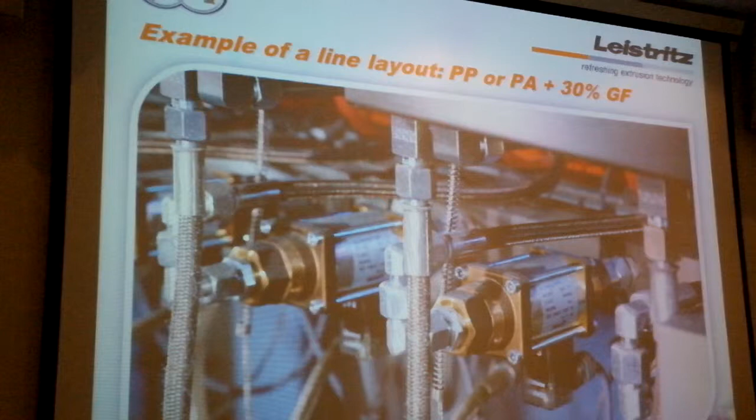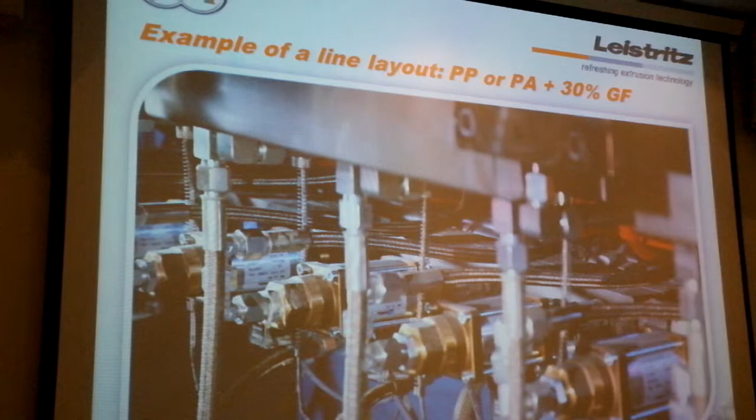Here we have the cooling magnetic solenoid valves underneath the process sections that steer the heating and cooling of the system. And again here the side feeder, with the glass fibers being incorporated into the melt, we go to the strand pelletizing.

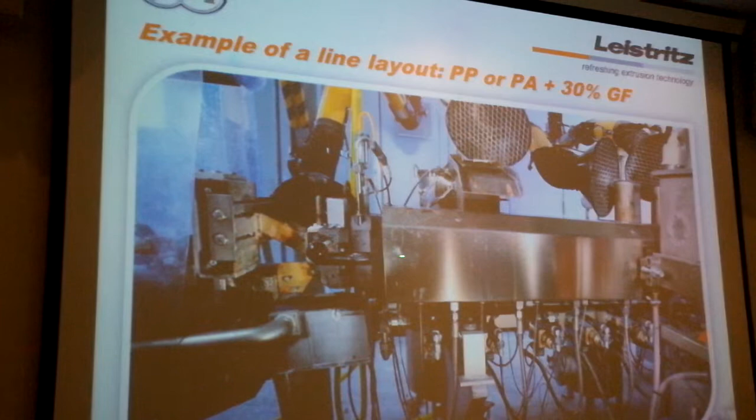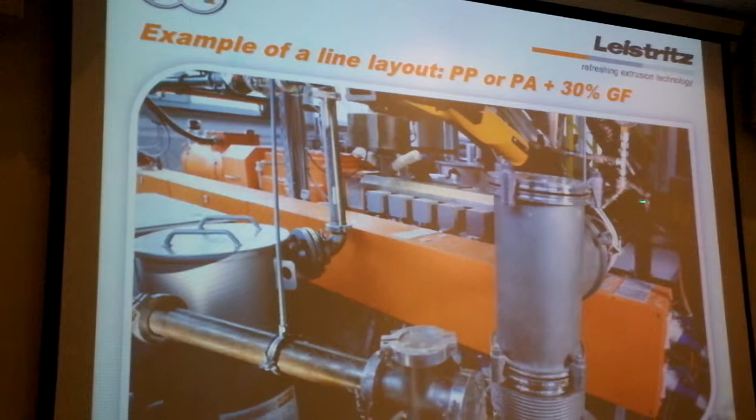Here is also a vacuum vent, which you can see from the back side now. Pretty interesting system, because here it's very important to get the condensate out, especially for polyamide. You know that this is a specific topic that we always have.

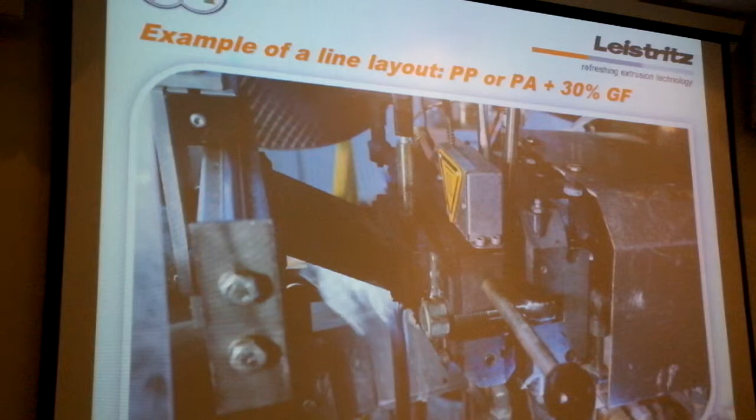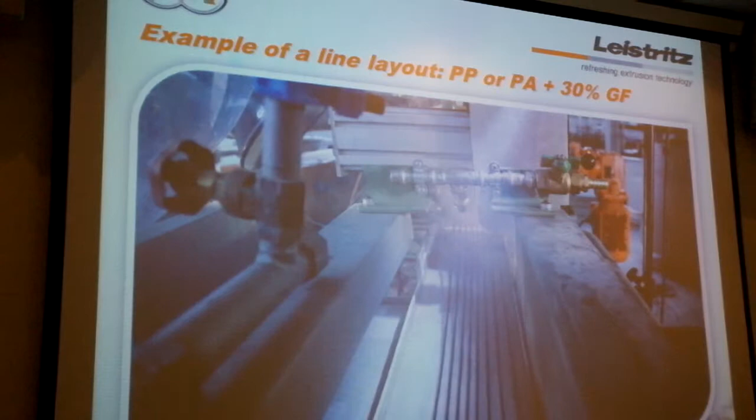And then here we have the strand die. Here we have the strands coming out, and this is an automatic slider. See, now you can change your production. Slide it and the bath comes underneath, and with that we can easily change products and also the cooling trough.

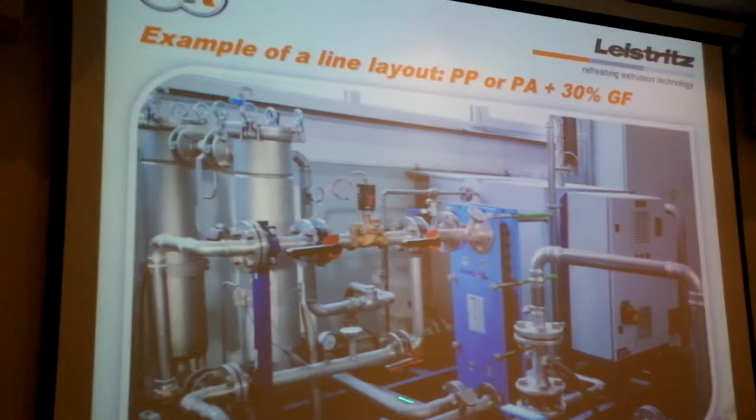Then the strands are cooled, brought into the cooling system. Here we have the water system for the cooling. Pretty elaborate one. Heat exchanger.

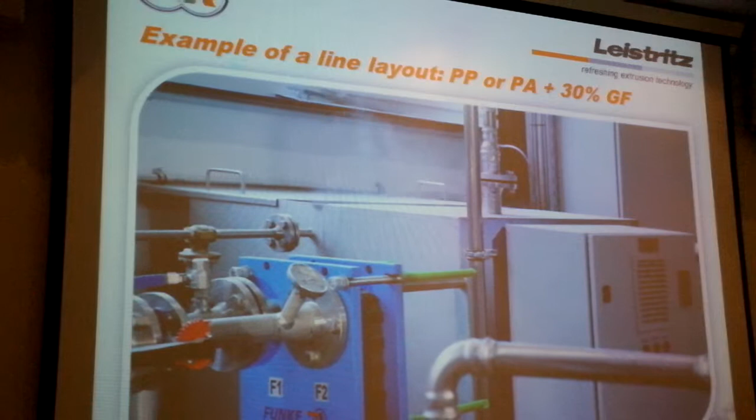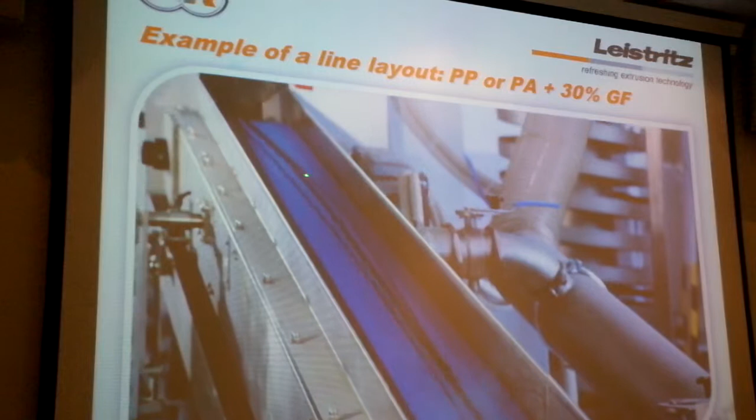And here we see the strands going up the belt. Here you see them still steaming from the water. And then they are guided into the pelletizer and cut into the little pellets, cylindrical ones.

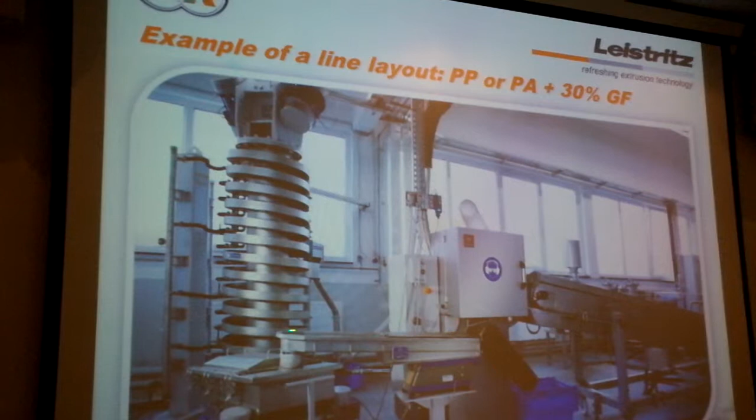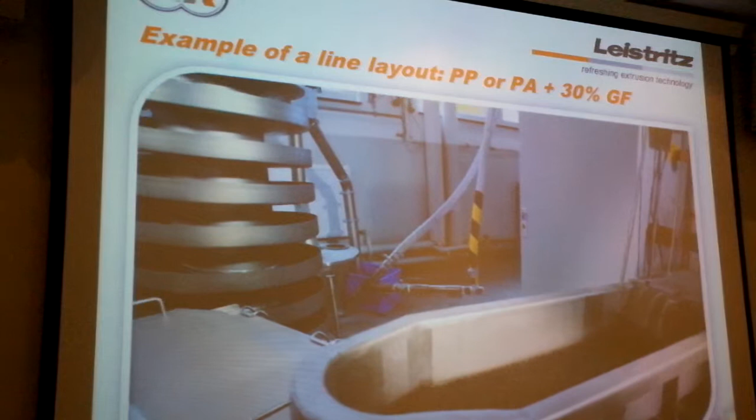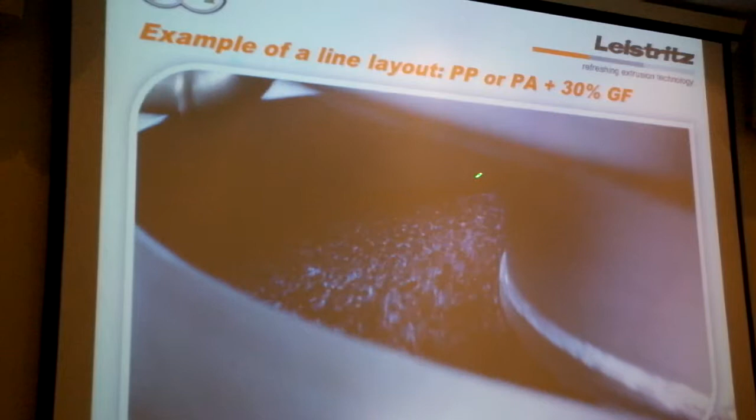After that we take them into a screen, and then in the vibration trough, you can see the screen. There we can take off the smaller pellets and the bigger pellets and just have the spec sizes. And then here we have the vibration conveyor, which brings the pellets up and cools them at the same time. So finally you have a very good, well-cooled and well-sized compound.

Of course, we talked about the ZSE MAXX machines and how they have a big impact on various compounding processes. And here, for example, we have the polyamide system that we just saw. And here we can see very clearly that with an OD to ID ratio of 1.66, we can keep the

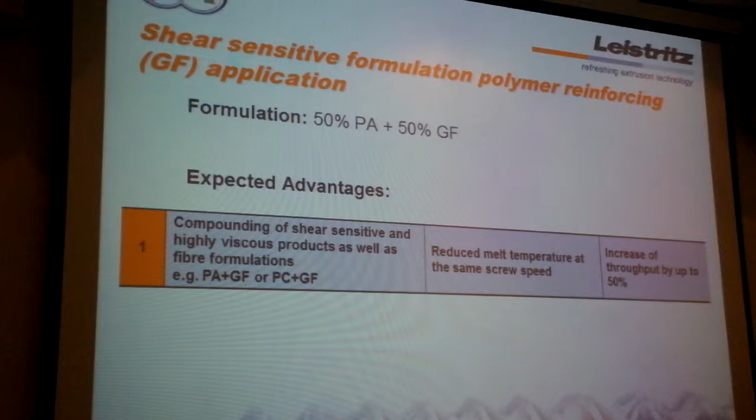melt temperature at a very good rate, and with that increase the throughput in a good way. So compared to the machines that were in the smaller OD to ID ratios, we were able to increase the throughput up to 50%, which is quite a number.

And sometimes it was not even possible to produce it anymore because of the high temperatures that we got.

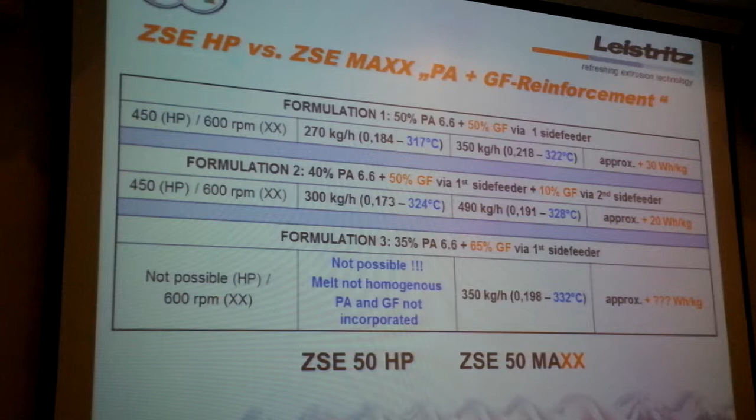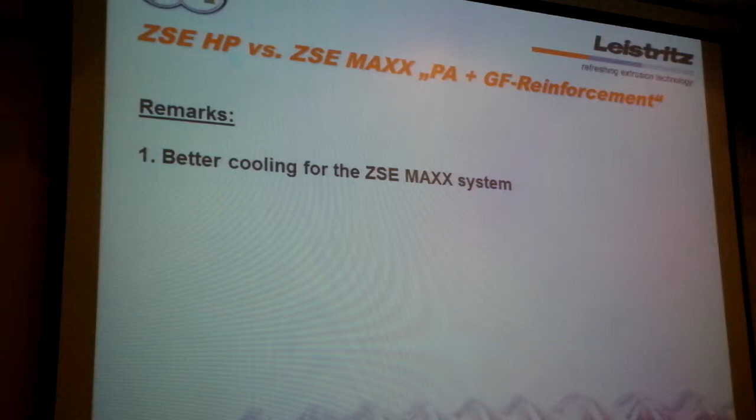Some remarks that you might want to keep in mind. With the 1.66 OD to ID ratio of the MAXX machines, we have a better specific energy input, and also at the same time the cooling system is improved, which means we have lower melt temperatures, and with that we can really have a very wide process window for these systems.

And with that, of course, you can run quite some different formulations with those lines.

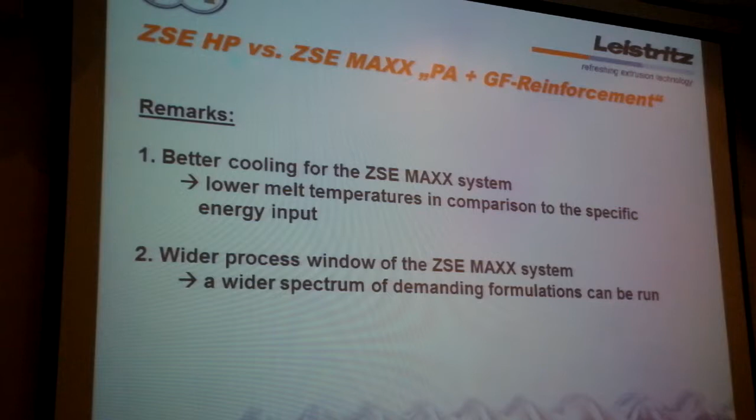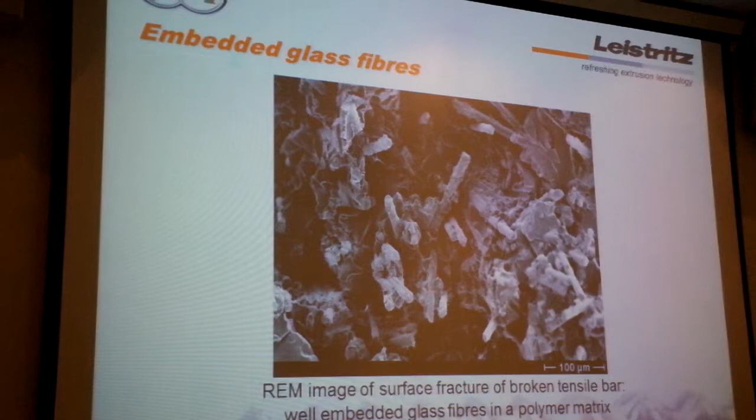So when you summarize that, we have a very high throughput possibility with the ZSE MAXX. Then of course the energy savings are implied, because when you need lower energy input and have a higher mixing capacity, you save energy. And especially for shear sensitive materials, this can be also a very highly recommended feature.

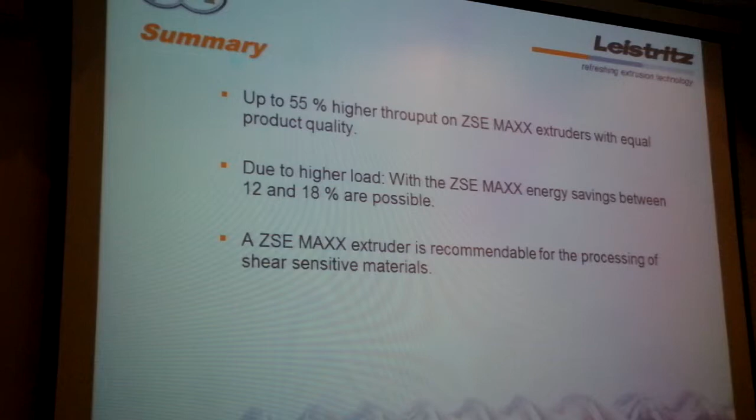And with this line, we can do very different compounding possibilities, like calcium carbonate compounding. We have possibilities of two side feeders. We can inject liquids. We can bring in even a polymer from the side. We have metal separators and so on.

And we have a hanging underwater pelletizing system, which enables us to walk around the line and reach it from every side.

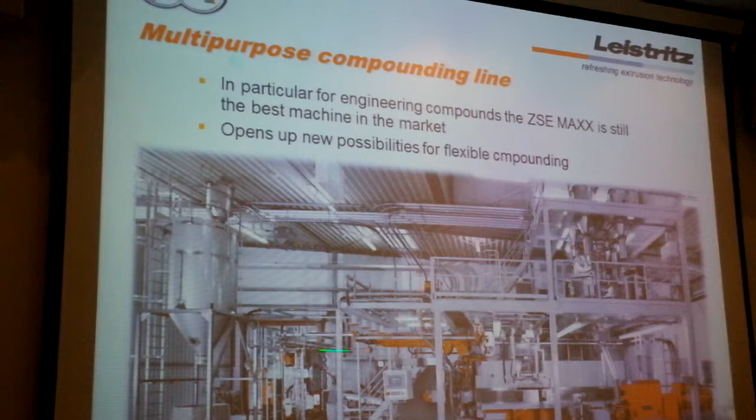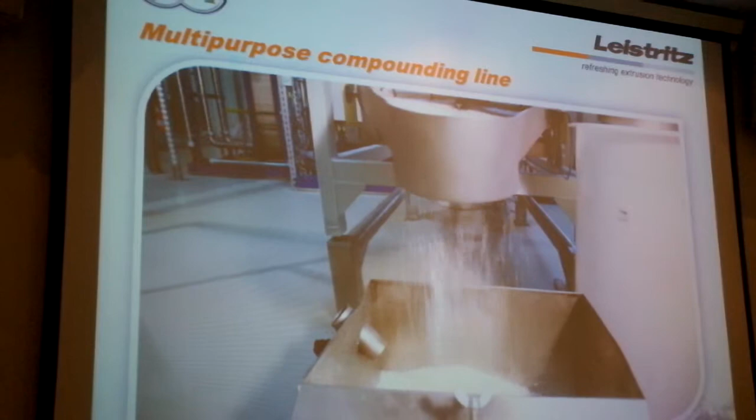Okay, let's look at a little video that you can see of this line. Here you see the output already, and here you can see the various feed systems that are installed at this line and can be brought to the extruder with pretty easy assembly.

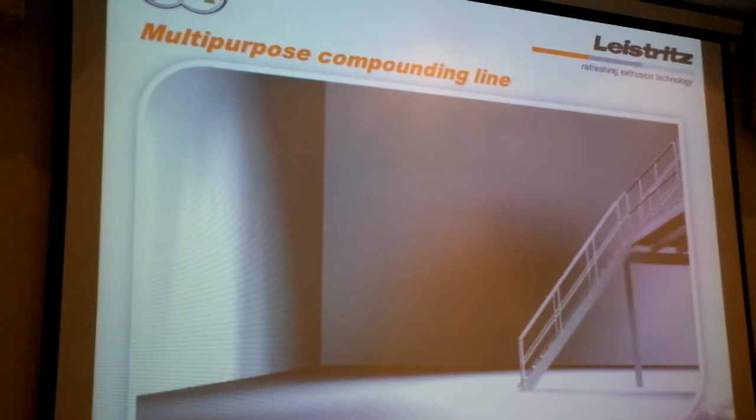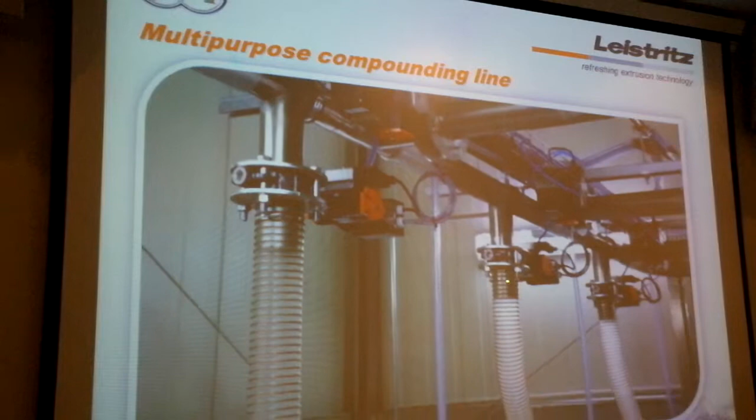Here you can see the picture of this line with the pre-bins. Again, we have the pneumatic conveying systems bringing the materials into the pre-bins. And we can use different materials, of course, and with that be very flexible.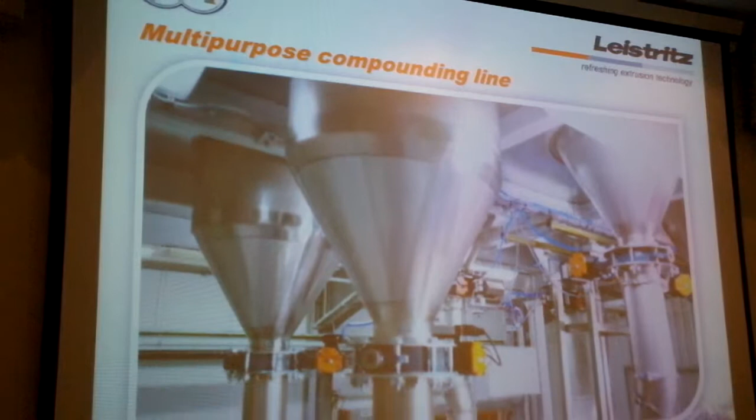Here you can see 6 different materials could be brought into the formulation. And we also, of course, have a combination of gravimetric feeders that can process the formulation to your exact needs.

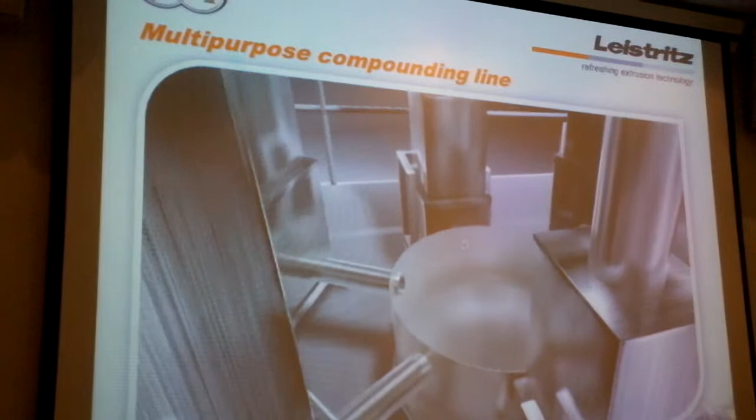Now let's put the various colors in. We just put the colors as symbols for various formulation ingredients.

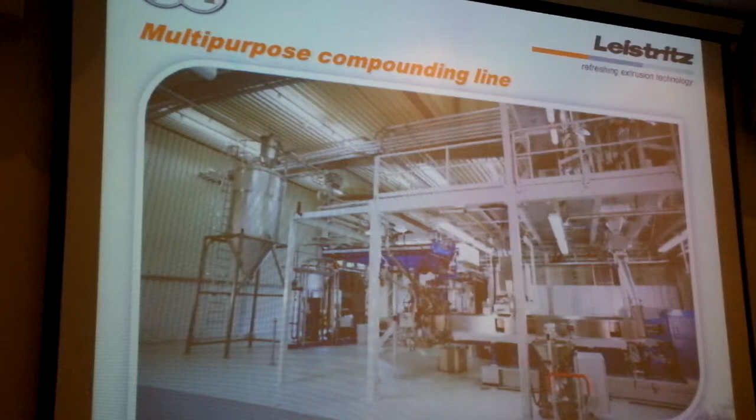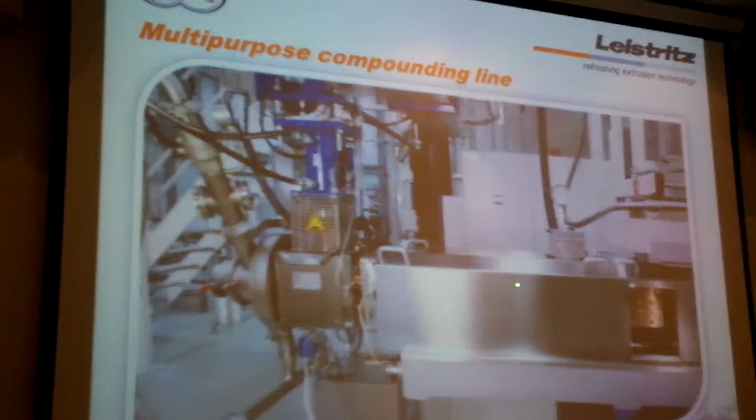Then we bring in these various ingredients into the extruder. And then we come to the pelletizing system.

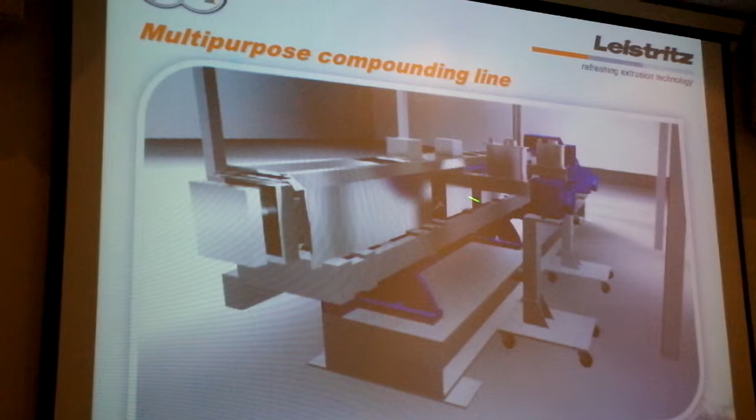Again, a little animation here. The side feeder, we can use various places for the side feeder to bring in other components into the formulation.

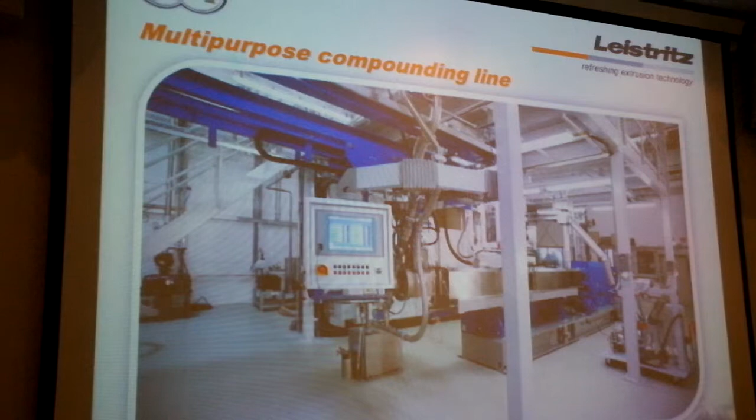Of course, everything is controlled with one control system, which means you can control the conveying system, the feeding system, the extruder itself, the temperature profile, and also the pelletizing system.

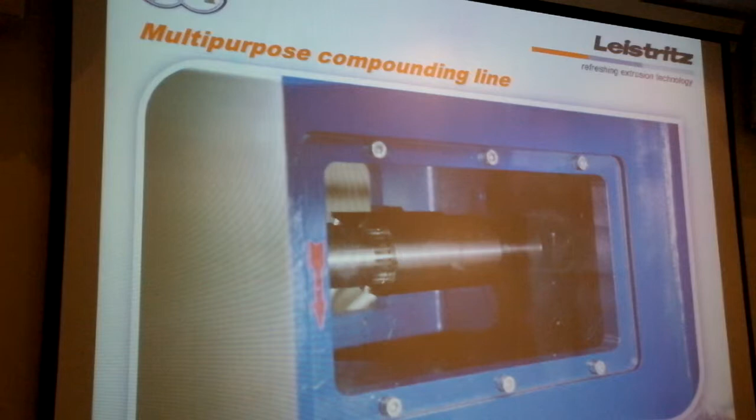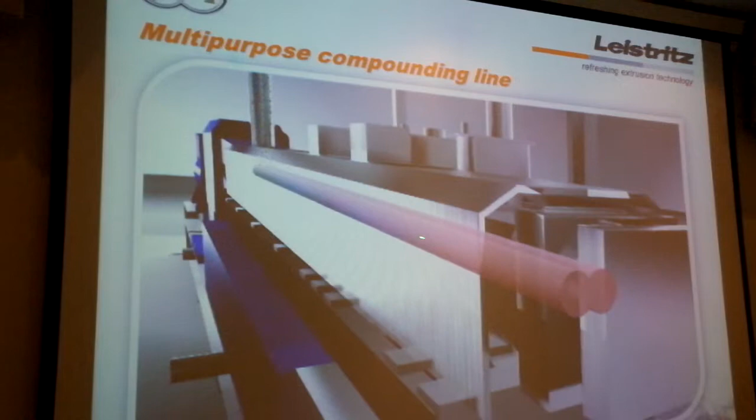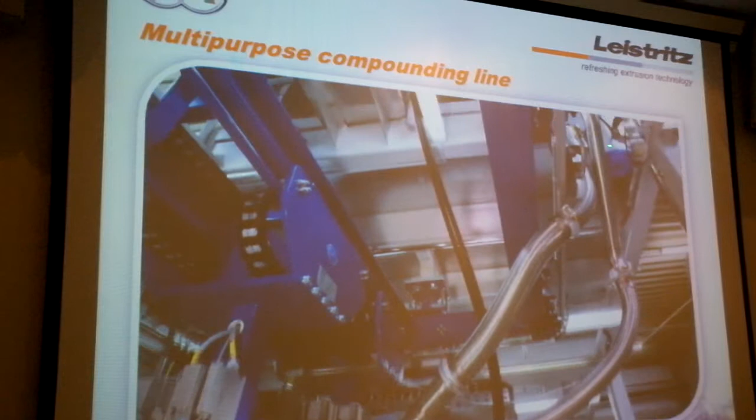What you can see is a hanging one. Here you can see the shafts of the screws. Now we bring the materials into the extruder. We melt it, mix it, and then bring it to the pelletizer. We generate pressure, and then we have an underwater pelletizer with the water running through a water system that is constantly filtered. Here you see the cutting wheel of the pelletizer.

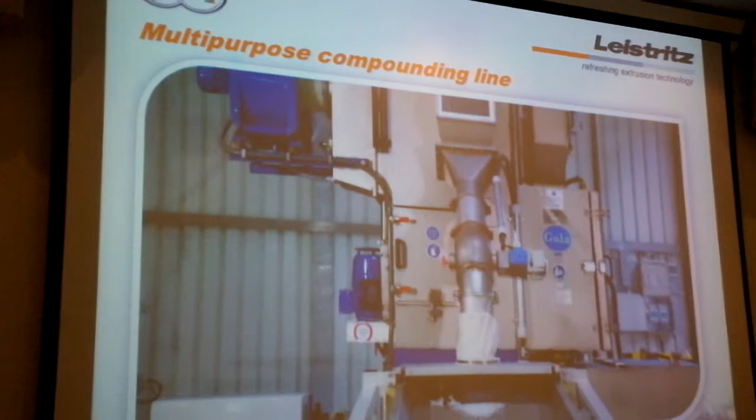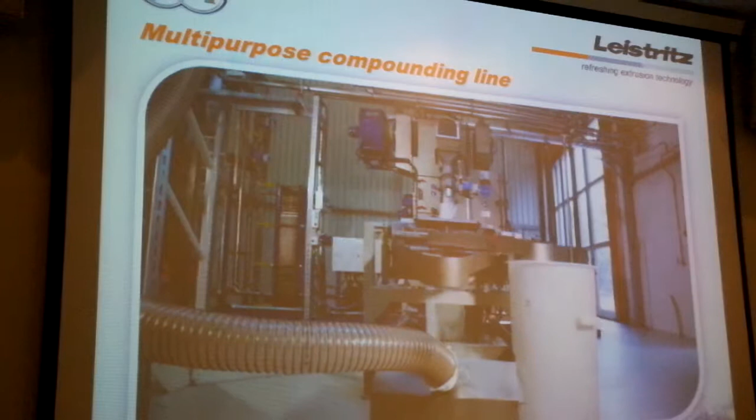And then finally we get another screen at the discharge of the extruder, which filters out the non-spec pellets. And then finally we have the bagging into the final silo or into bags.

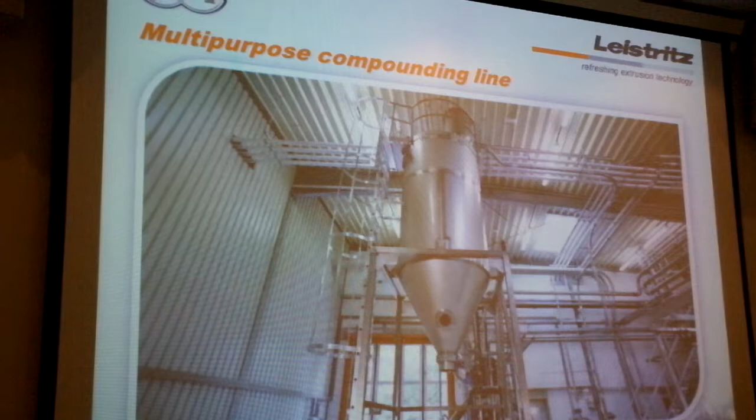So with this line you can produce almost any kind of compound you want. It's very flexible, and with the ZSE Max machines, a very helpful line with very high productivity also guaranteed.

And now finally we want to come to another topic, which is inline compounding. We wanted to have a customer with us today from Visa, a big company. I think Klaus Heinrich, who is the responsible salesperson, sold a special line for this company. Mr. Balayev wanted to be with us today, but he couldn't make it because he had very important automotive industry customers come in, as you already saw at the beginning slide. They are the most important customers, as you know. So he couldn't come here today.

So Klaus Heinrich and myself, we want to explain a little bit how this line works. Then I think we'll be done a little earlier than expected, because we all need coffee, I know, and then we will continue with another paper. But let's first look at that line. Maybe Klaus, you can come here to the front.

There's another microphone. Good morning, ladies and gentlemen. I would like to introduce myself. My name is Klaus Heinrich, and I'm the responsible sales manager for your country, together with the company in Duko, with Mr. Zirkulev. We would like to give you now the technical information about the inline compounding line for the automotive industry.

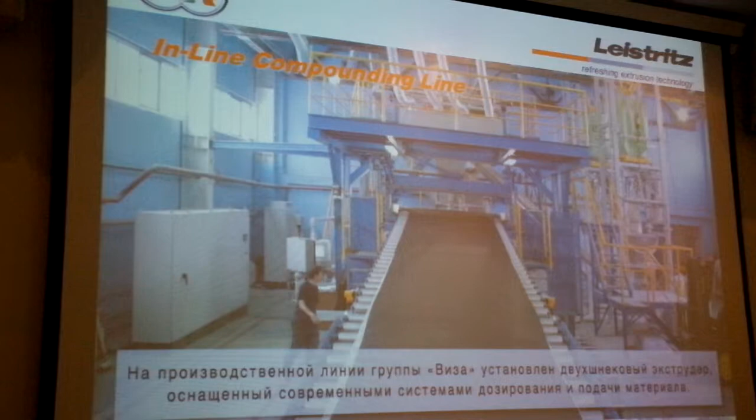As Klaus already told us before, we can see that here we have the need of insulation. As Michael told, you can see the sheets before in the cars, and this is the film to manufacture the foils continuously in a width of 2 meters.

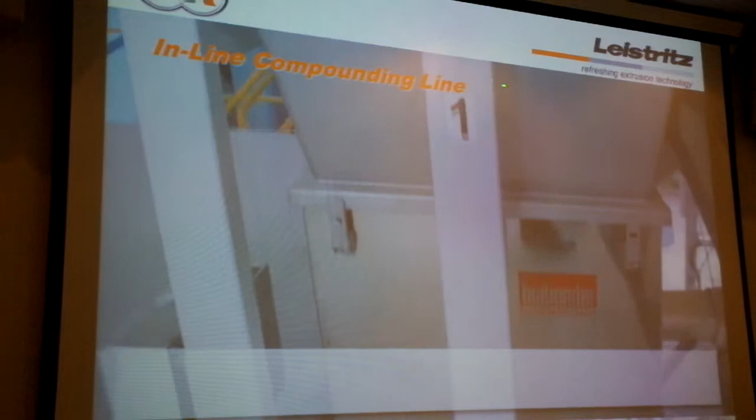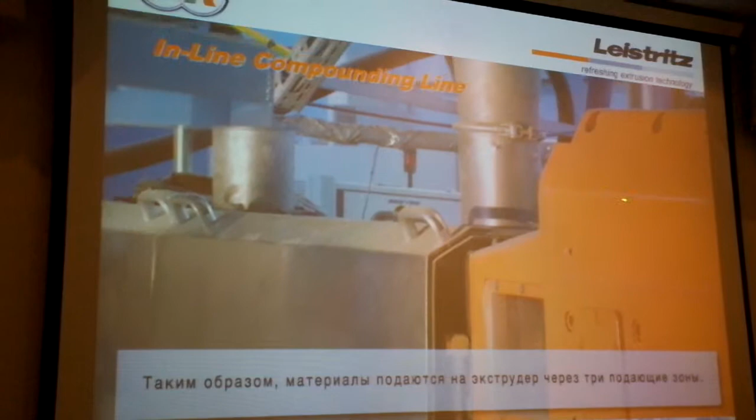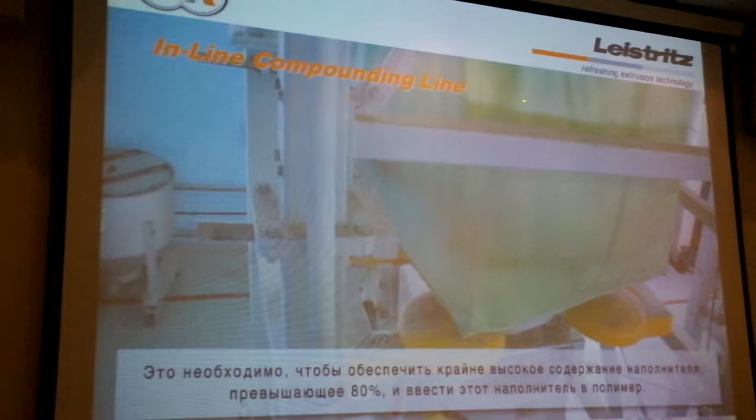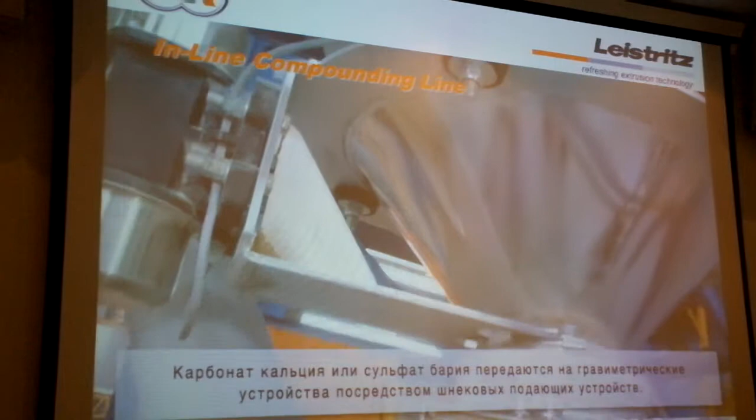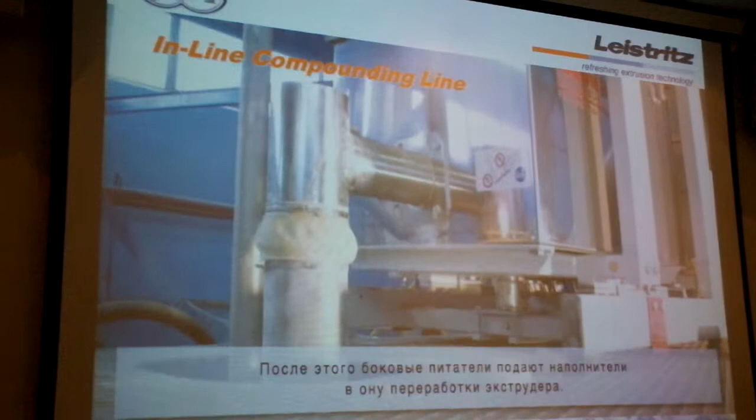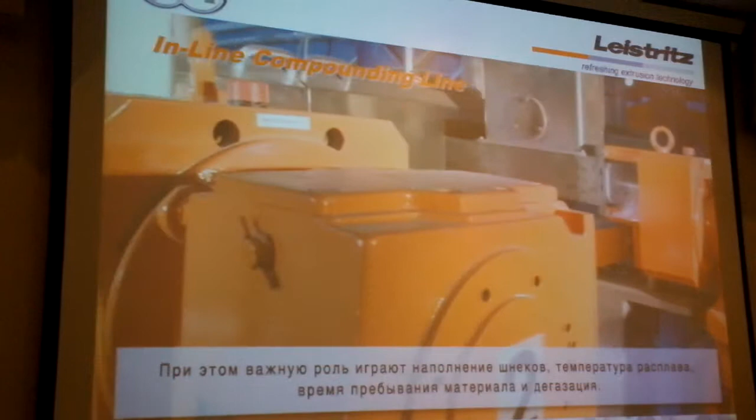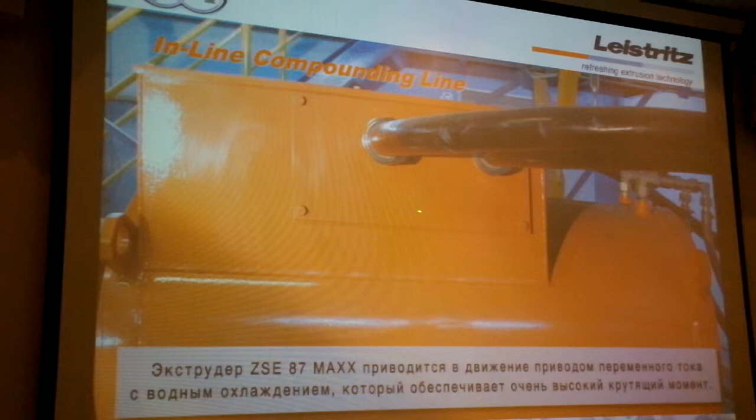So it was a turnkey project, so we installed everything and made the commissioning very successful. It was installed in 2007 and up to now is still running without any problems. See the screws, the drive.

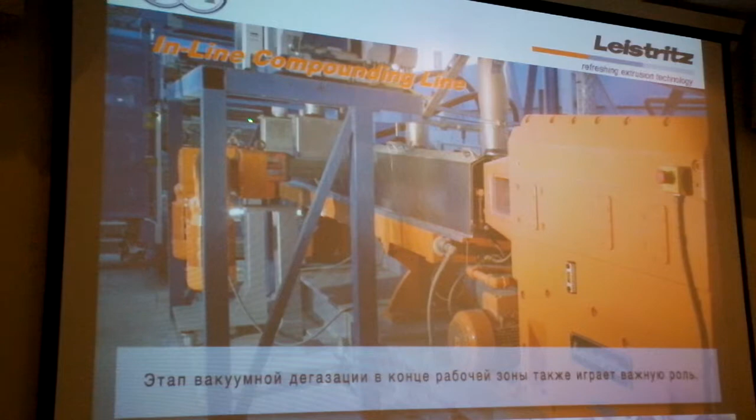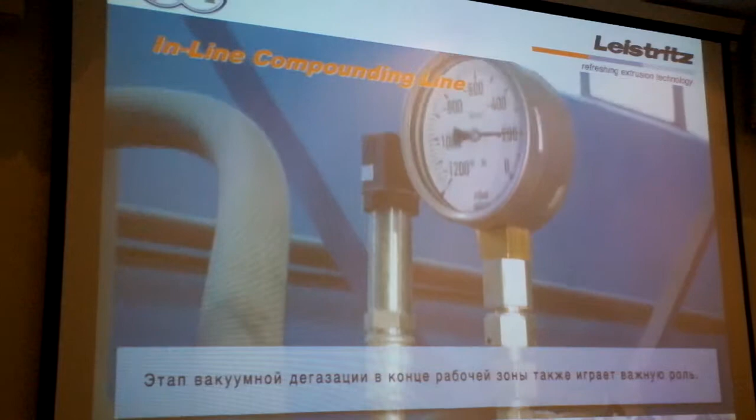It's a water-cooled drive with a safety clutch, a gearbox from Flender, and the barrel layout. Before finding the right screw configuration, we did a lot of trials together with the customer in our lab. This is very important and necessary to fulfill the quality and also the throughput.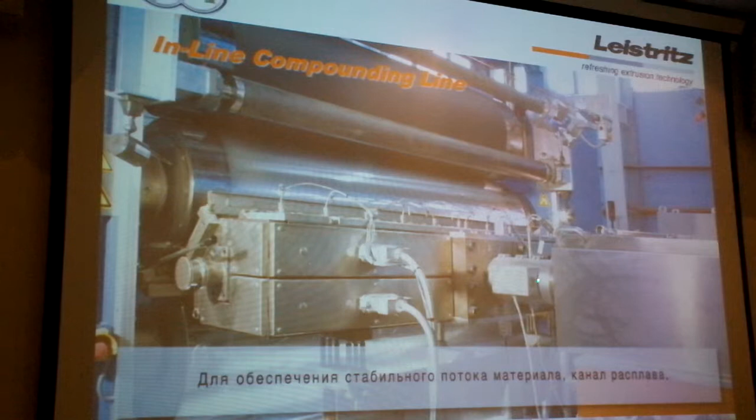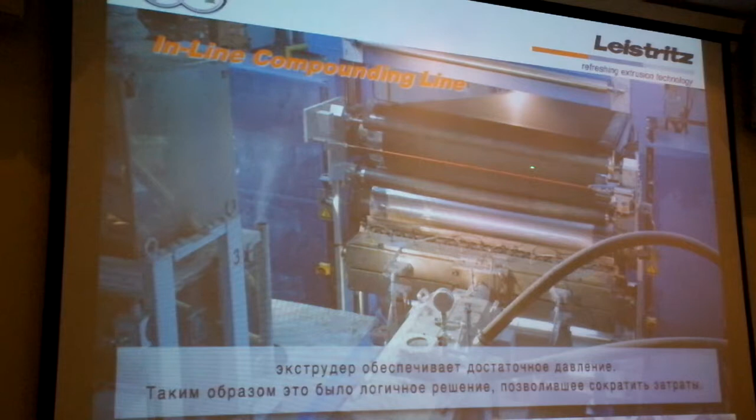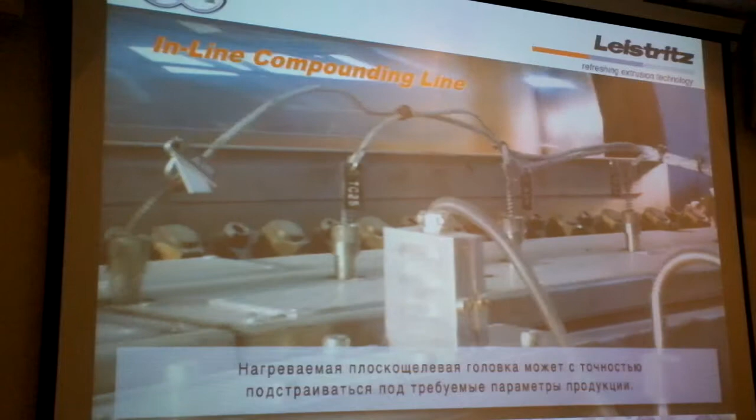So here is the adapter, the die head, flat die head. From the flat die, the compound comes through the flat die head into the calender. The calender is responsible for the thickness and cooling down the material.

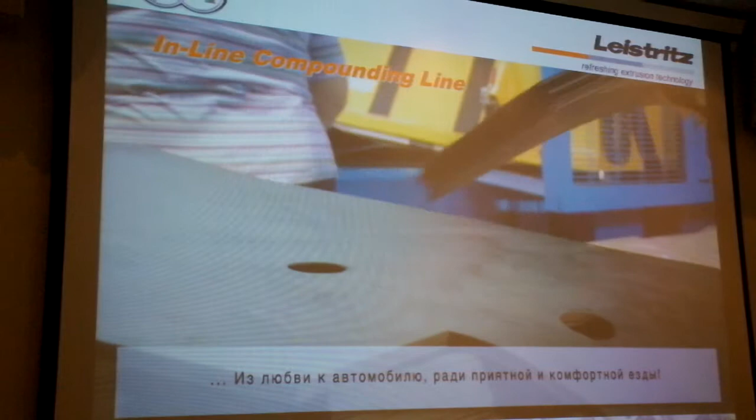The thickness is very constant, and he can also change the dimension of the product.

Here you can see the P&ID in principle. So we have pre-mixing with a mixing system. The mixing station automatically, where we can fill in some polymers and also some parts of bitumen and so on. I will explain more about the formulation later. This is the mixing station.

Then we go with a container, mixing container, up into the main feeding zone of the extruder, here. Then we have two side feeding systems where we can feed up to 80% of calcium carbonate, in this case, or barium sulfate. It's coming out of the big bag emptying station with a screw up into the side, into the dosing units, and via side feeding system into the extruder.

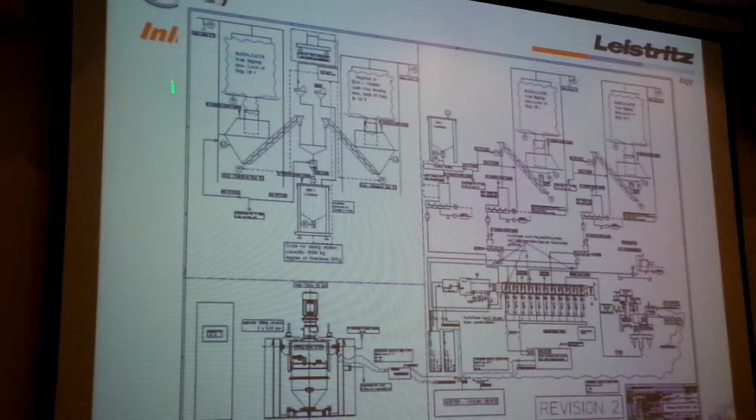Also vacuum is inside, and also a dosing unit for liquid. This was a compounding part which we supplied in 2007.

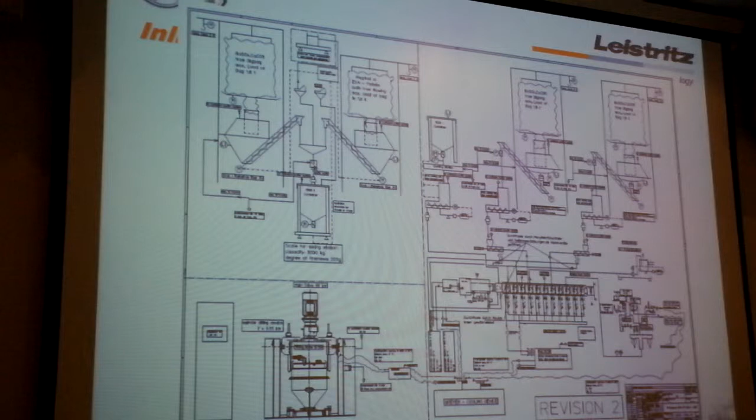Okay, I think you've seen quite some different lines. You've seen twin screws, you've seen our technology, and of course, for some of you it might be interesting, for some of you it might be very boring, but still, if you have questions, now would be a good time for it.